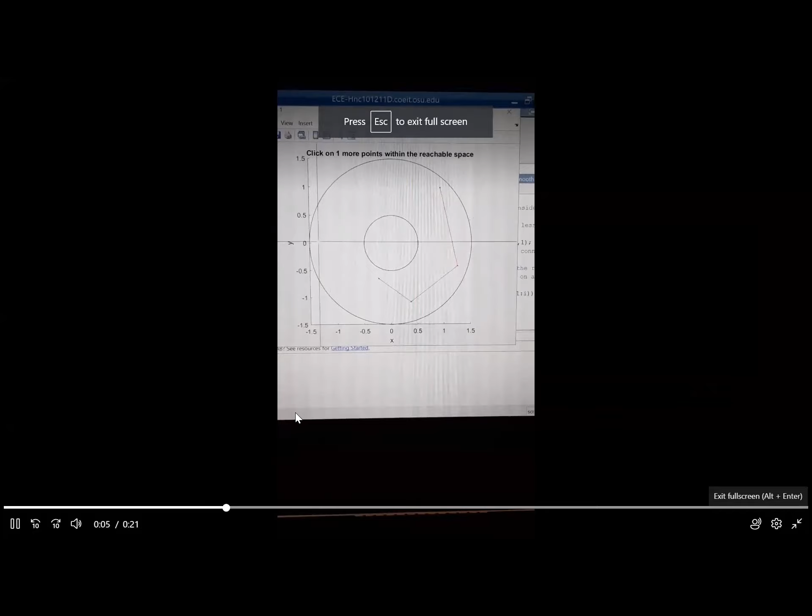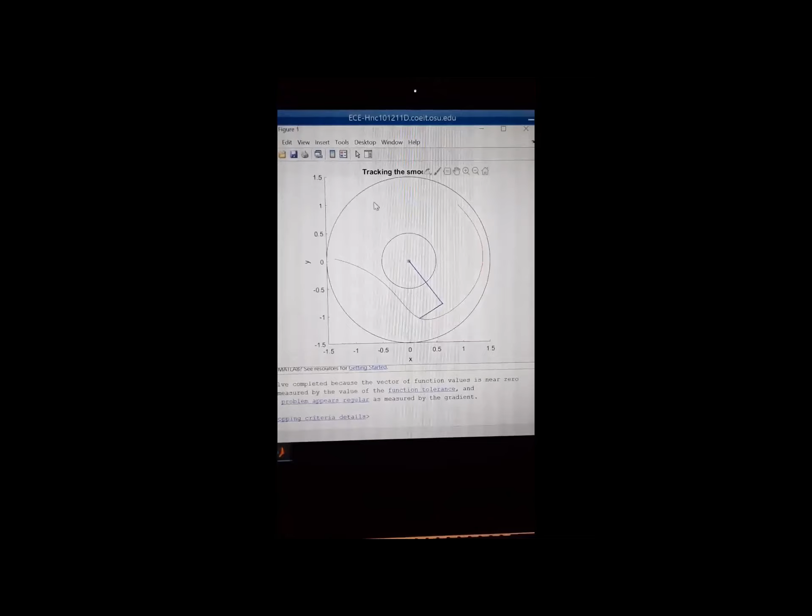So here they are picking the points and it is drawing the line. This is very good because I can see where the points are. It fits the curve. Then this is your 2-link robot. It starts from the initial point and tracks this line. If you remember, every line is made of points. You know the desired point that your end effector needs to reach at every single time. You choose what method to solve it with. I can't help you more than this.

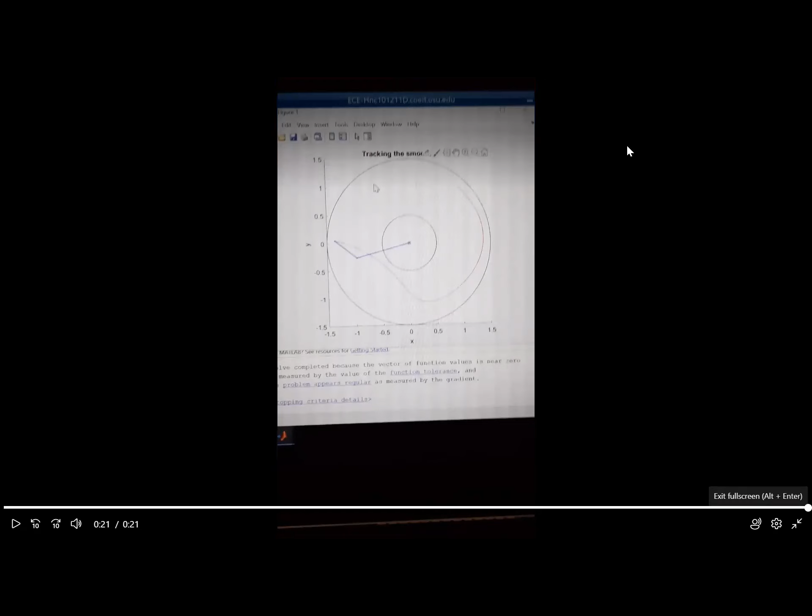All right. Then solve first for the general simple case. Once you figure that out, try to think, okay, what are the other scenarios that can happen? What if the curve goes into the white space that is not the workspace? What can I do in my algorithm so that the robot doesn't break, continues on something and goes back to it? All right. I've given you like 4 or 5 tips. It's recorded, so when you're doing the assignment, go back and listen to this part.

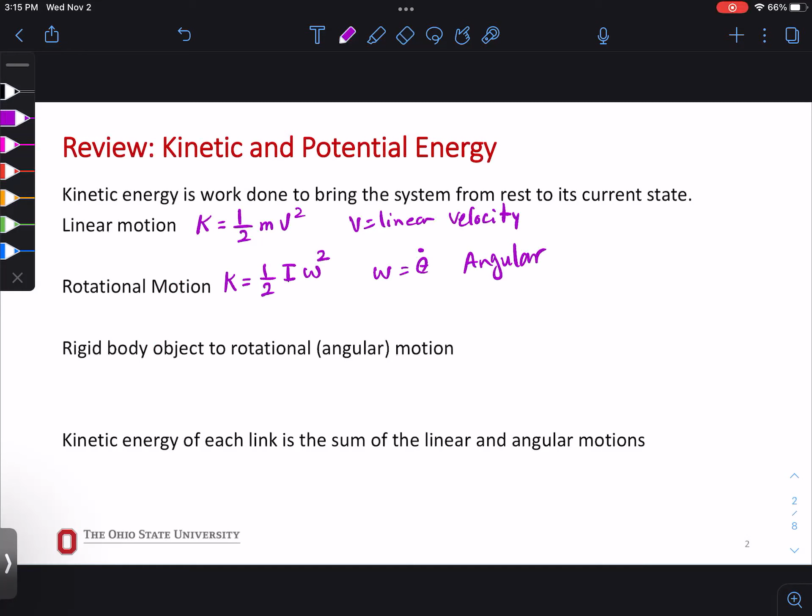For a rigid body that is subjected to rotational or angular motion, so this is when we usually talk about one mass, right? When we have a rigid body, we usually have an accumulation of links that are connected, and we show them with a mass. So in a rigid body, you could have different masses. Now, how do we write the linear and rotational kinetic energy for that?

For the rotational, the equation is almost the same thing, but the way we write it is different because we need to perform matrix multiplication. That's the only difference. So K would be 1/2 omega transpose I_C omega. I_C is your tensor of inertia; it's in matrix form.

For kinetic energy of each link, you could write that for the linear motion as well, right? So how would it look like for linear motion? 1/2 mi of that link, because that's a scalar, right? V transpose V. So you can actually multiply them. Yeah, 3 by 1 and 1 by 3.

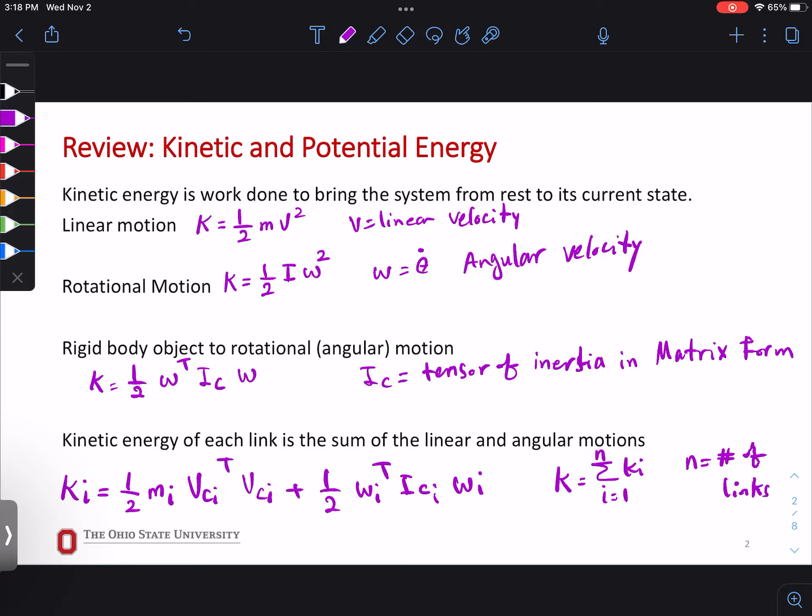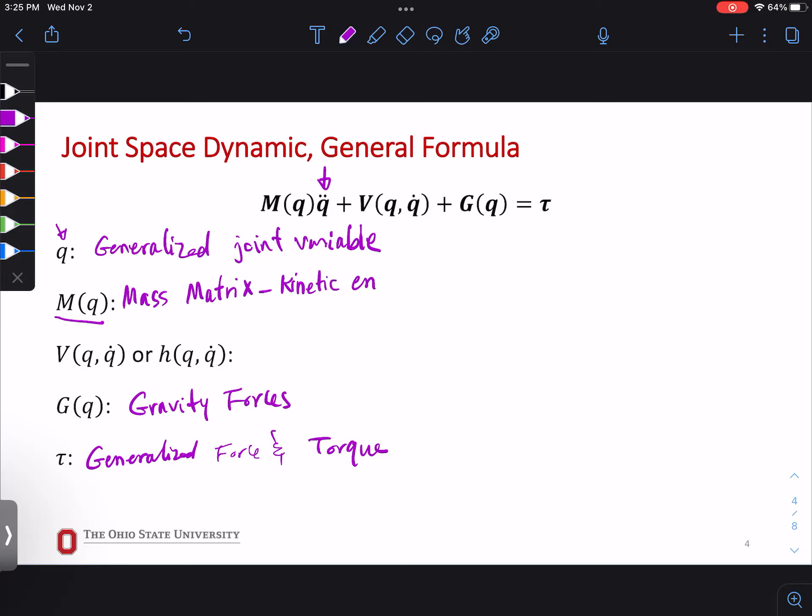Generalized joint variable. All right, so what is M of Q? It's multiplied by Q double dot. It is a mass matrix. You will see it represents the kinetic energy. This is always symmetric and positive definite. For positive definite, I'm gonna add it to our next lecture, why positive definite and what is it. But it has to do with the eigenvalues; all the eigenvalues have to be positive.

Now we have this term, we either call them V or h. Do you remember what they were from before? These are quadratic terms. What did they represent? So these are your quadratic terms, and there are two terms. There is first derivation in them, which if you have the product of first derivations, qi dot times qj dot, of two different joints, these are the Coriolis terms. If you have the product of qi dot squared, this one is centrifugal.

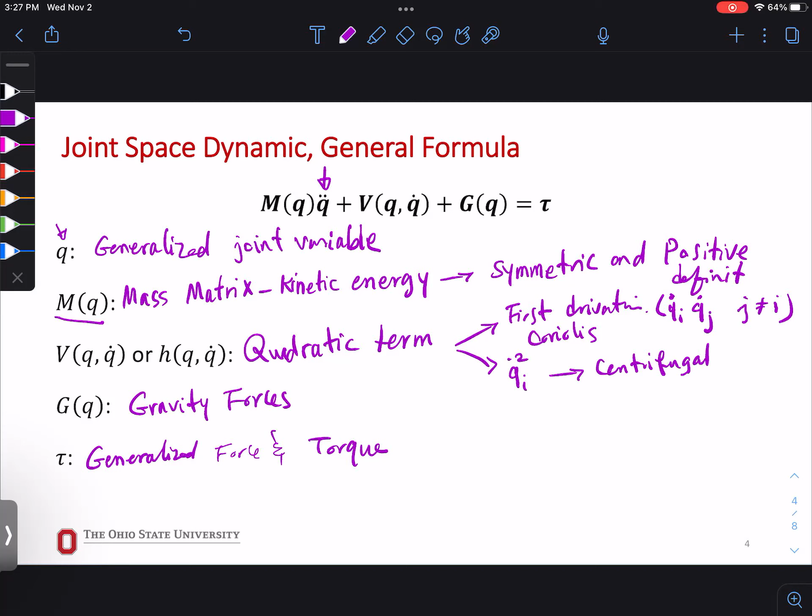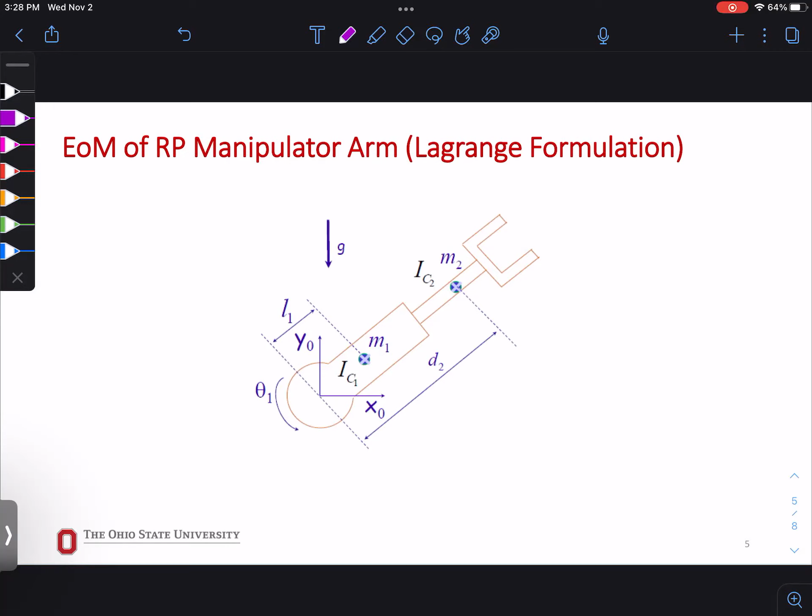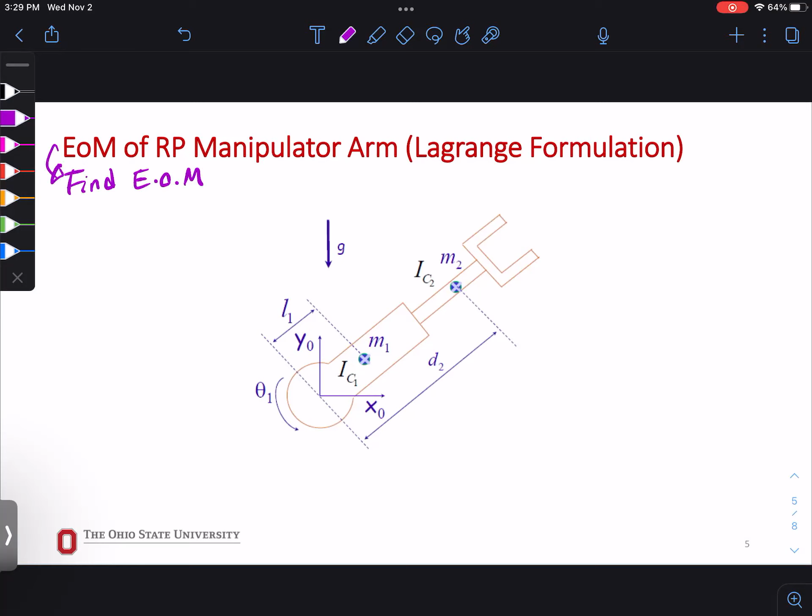And you also asked me, can you write down the question? What is it that you're trying to find on each example? Equation of motion. Usually, if an example comes after a piece of lecture, that is the question. So find the equation of motion of an RP manipulator with this information you have. You also have two more pieces of information. Let's say you know IC1 and IC2: IXX1, IYY1, IZZ1, and similar for the other one.

So this just means, assume we have this. What is your approach? I want everyone to write their approach. How would you solve this, step by step? That's all I want. No, step one, are you trying to generalize, what is the next? Not in the math. What are the steps that you can take to solve it? What is step two?

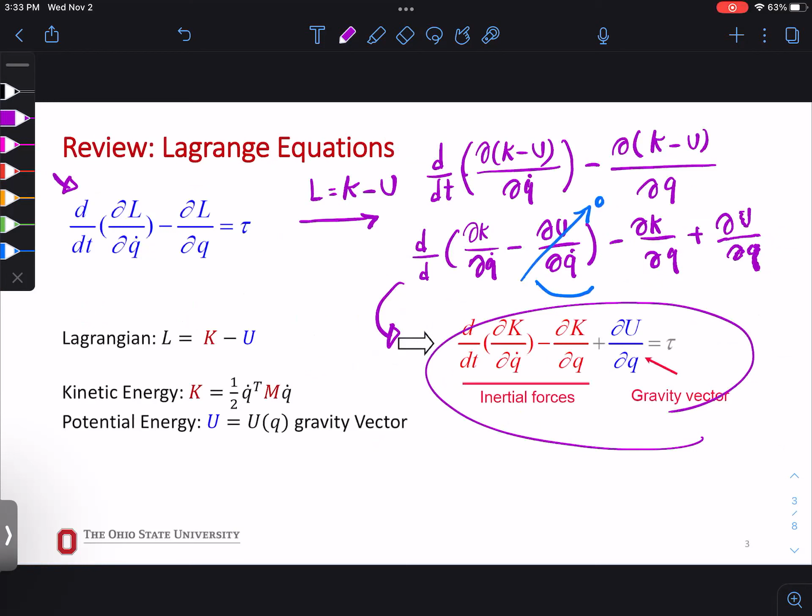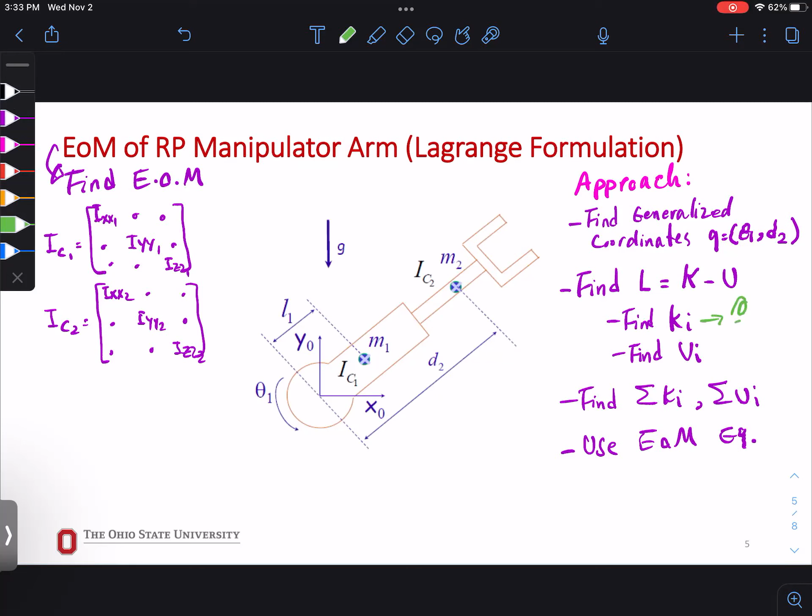Find your Lagrangian, which is K minus U. I know I need to find my Lagrangian because I'm going to use the general form for the equation of motion. Now to find the Lagrangian, I need to find Ki and Ui. So the next thing would be find the Ki's, find Ui. Once I found them, find sigma Ki and sigma Ui. Now I can create my L, then I can use the EoM equation, which is this guy. So this is your approach. The rest is just doing the math.

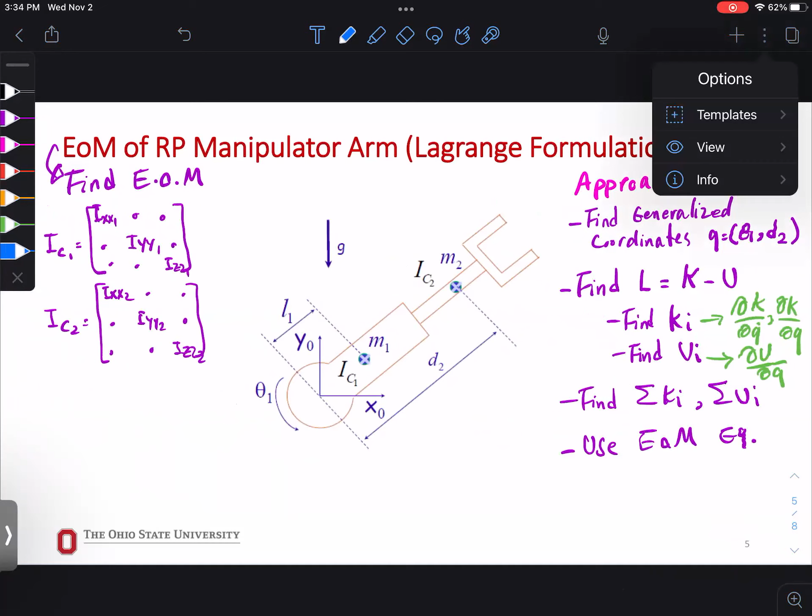I'm gonna actually now solve it, following my approach. I found Q is theta 1 and D2. We don't know what the prismatic is, but there is D2. You can assume the zero of the prismatic from here all the way there. Does it matter? You can say it is like a D3 from the end effector plus a fixed value. You can also do that. Because prismatic is a fixed value plus a variable, you can use it separately or just put them all together.

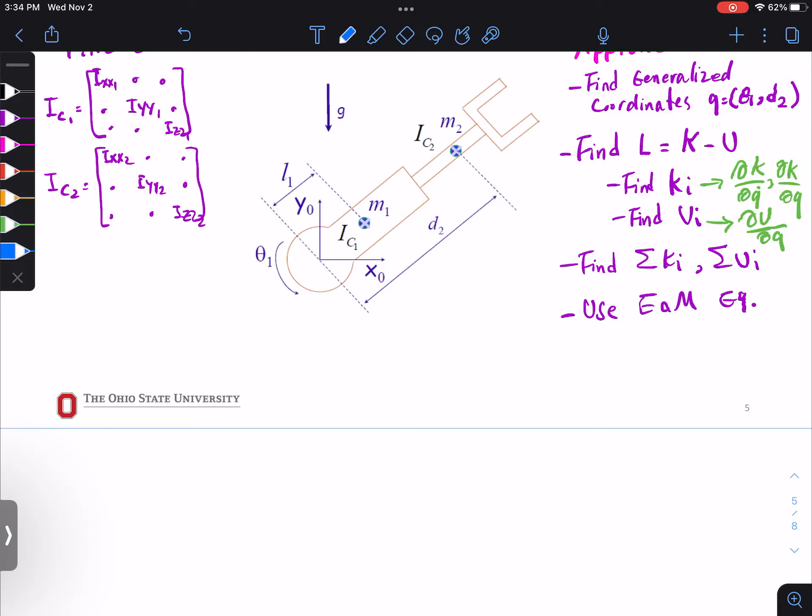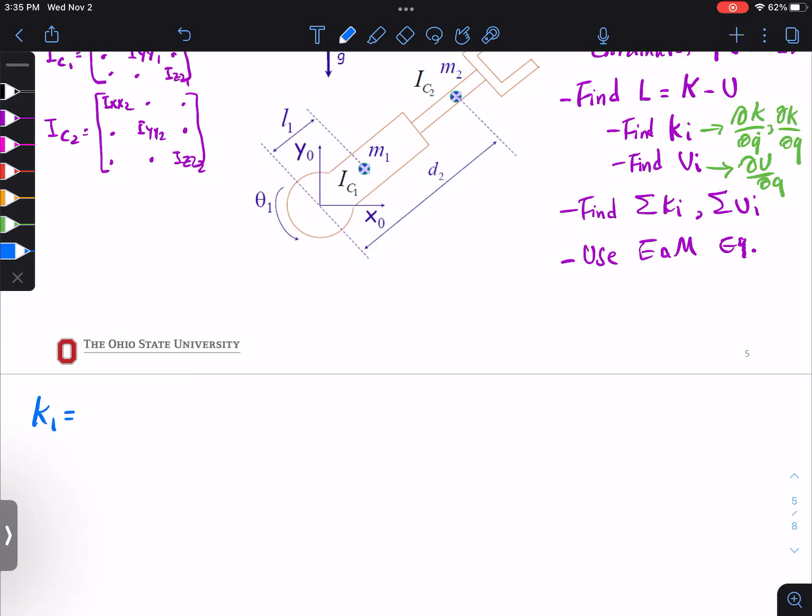So just easily change, but there's always a fixed part into it. So just make the equation easier for myself there. Now I'm going to start writing, finding Ki and Ui's. K1, because I have two links, so I know I have K1 and K2. K1 is 1/2 M1 L1 squared theta dot 1 squared.

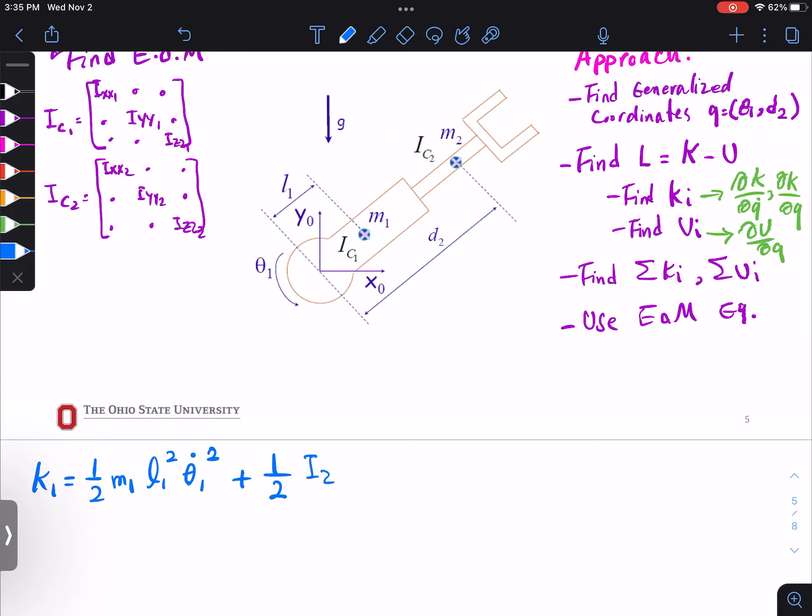How did we do that? If you remember the example before, we got into this. You can write in X and Y direction, and then when you calculate both of them, you will get to L1 squared theta dot 1 squared. So that's the linear part of it. Plus, we have the rotation because of the revolute joint: 1/2 IZZ theta 1 dot. I'm solving it for one link at a time right now, so I can do that. Then this becomes 1/2 M1 L1 squared plus IZZ, and I can factor out theta dot 1 squared.

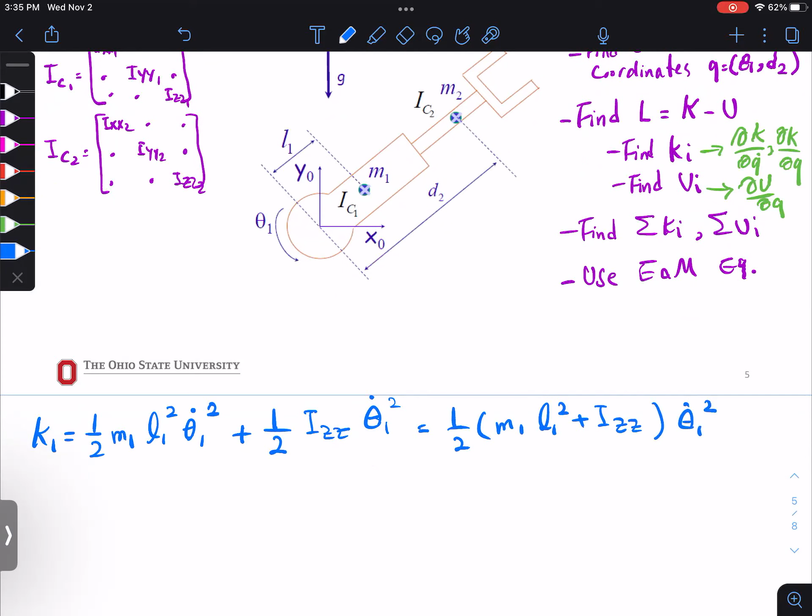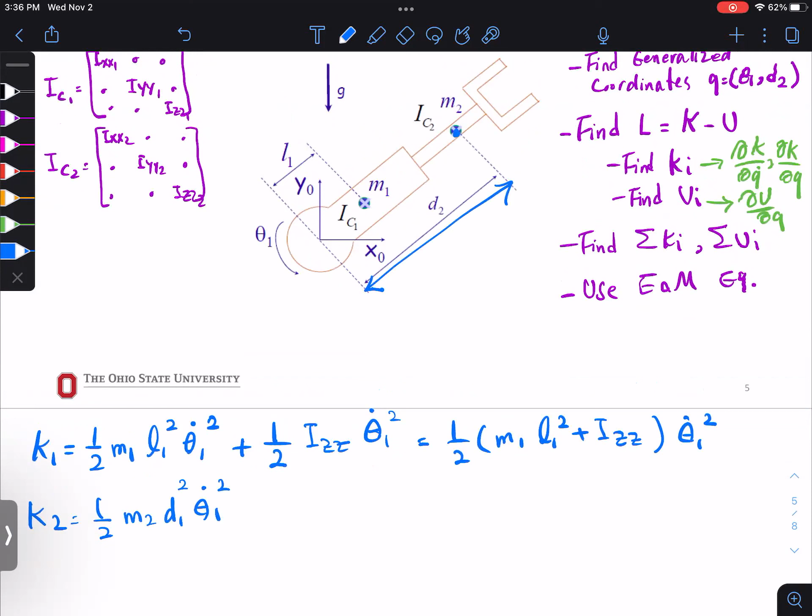K2 is 1/2 M2. Now this one is going to be this distance, D1 squared theta dot 1 squared, plus 1/2 IZZ2. So that one is ZZ1. Theta dot 1 squared plus 1/2 M2 D2 dot squared. So what happened here? Can someone explain it to me? Why do I have two terms for linear velocity? Well, for kinematics, I have two kinematics terms, right? Why?

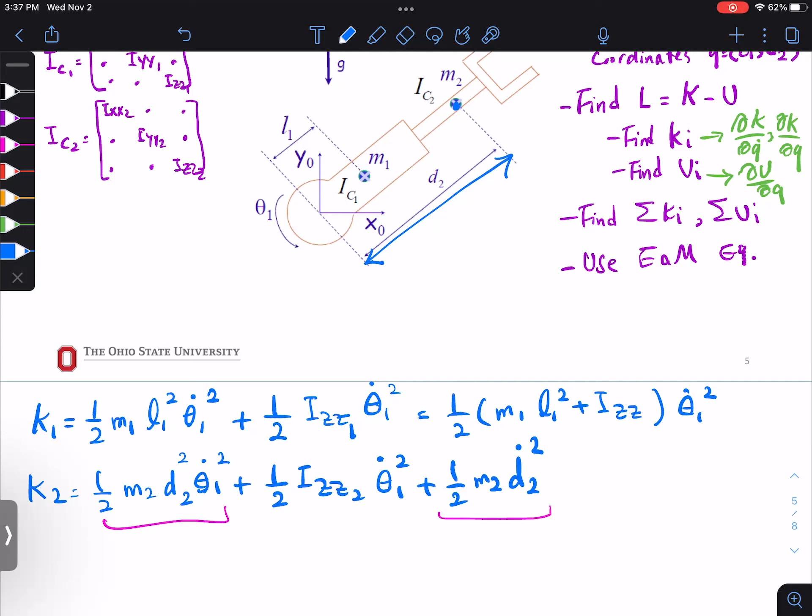Yeah. One because of the rotation, one because of the kinematic. So, assuming that you remember all of this, you are using your knowledge from before. Okay, it should carry. So D1, so you are separating, let me check, make sure that I'm saying it right. It's D2. Yeah, I figured I was wrong. Yes, it's D2, because it's the distance to the center of mass, but because of the rotation of the first joint, there will be a linear velocity there. Thank you. Then the second part is the velocity that way. So you have two different vectors of velocities, right? One is pointing this way, one is pointing that way.

Now we have K1 and K2, we put them together, right? That becomes your kinetic energy. So your K is K1 plus K2. I'm gonna write this one down with 1/2 because you'll see how the mass matrix will play in here. How about U? What is U1? What is U2? Right? So this is your gravity, mass 1, mass 2, mg1, mg2.

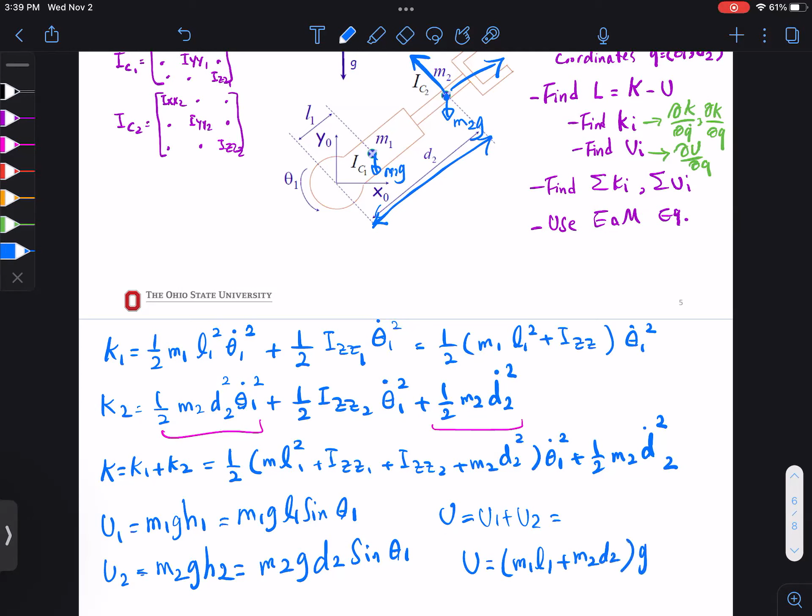M1 G L1 sine of theta 1. Then the second one is M2 G H2. Here it is M2 G D2 sine of theta 1. Now, because we counted this as D2, we don't have to add them. But if you had it separately, you'd simply just have to add to this, right? So it's not a big deal. I have to find U. So U1 plus U2 is U. So U becomes M1 L1 plus M2 D2, times G sine of theta 1. This is U. This is K.

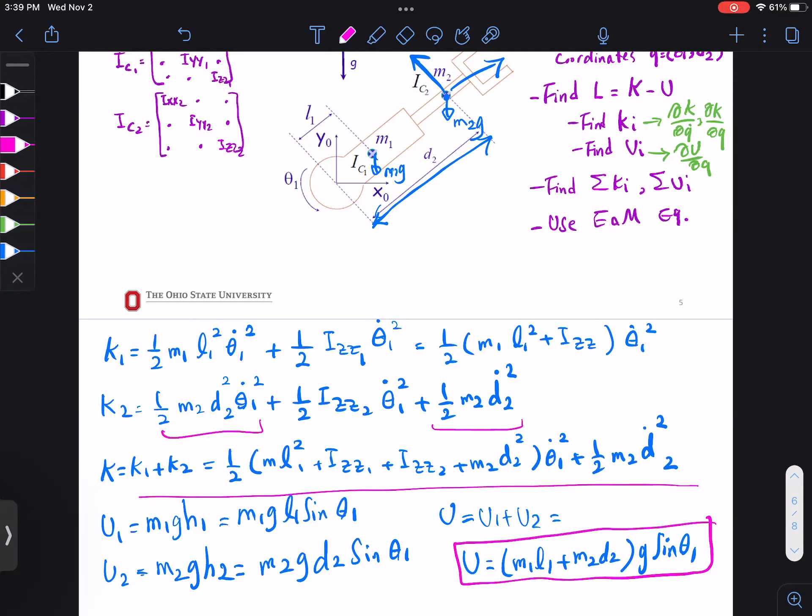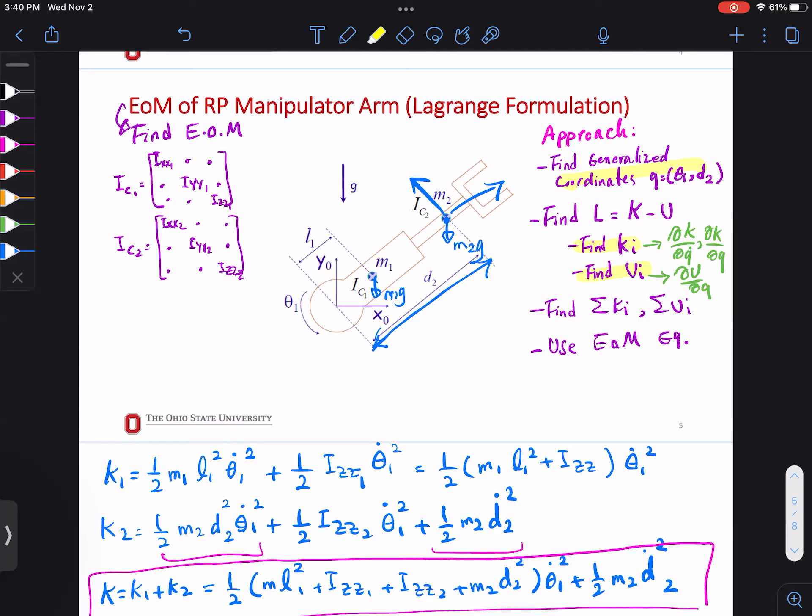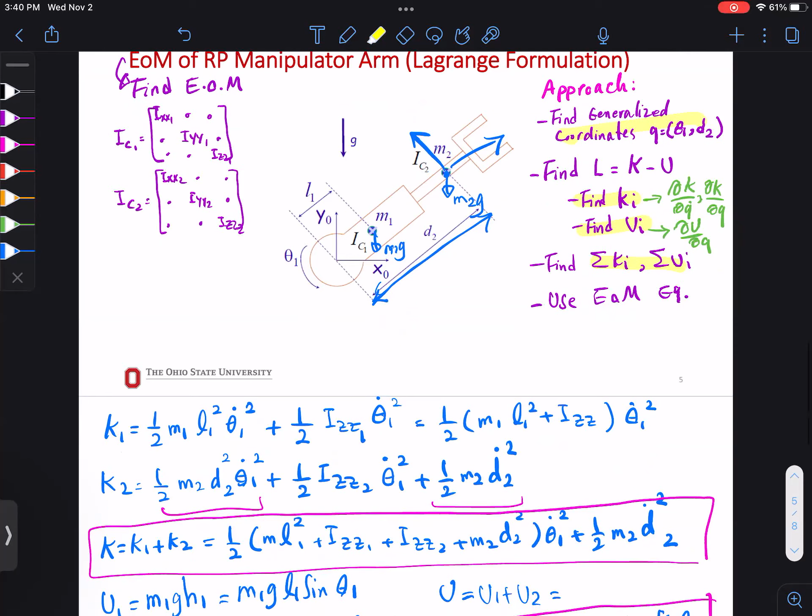So I did this, so I'm gonna mark it. Did this first part, did this part, right? Now, I kind of skipped the green part because I found this, but I still can't get the differentiation, right? It doesn't matter. I could do it separately and put them together or just put them together. So the next part that takes a lot of calculation is the partial derivative part of it, right? You have to do it one by one.

So for K with respect to Q dot I, right? And I also need to find d/dt of partial K over Q dot I. So I'm putting down what I need to find. I'm following my steps. Then I also need to find K with respect to Q. One more, U with respect to Q. Now let's see what they are.

So since we have two links, these are all 2 by 1 vectors because they have 2 parts, K1 and K2. So partial derivative of K with respect to your first joint variable, theta dot 1. Partial derivative with respect to your second one, which is your D2 dot. Here you have similar, but with respect to your Q, so it's theta 1, and then this is with respect to D2. Here is U with respect to theta 1, and U with respect to D2.

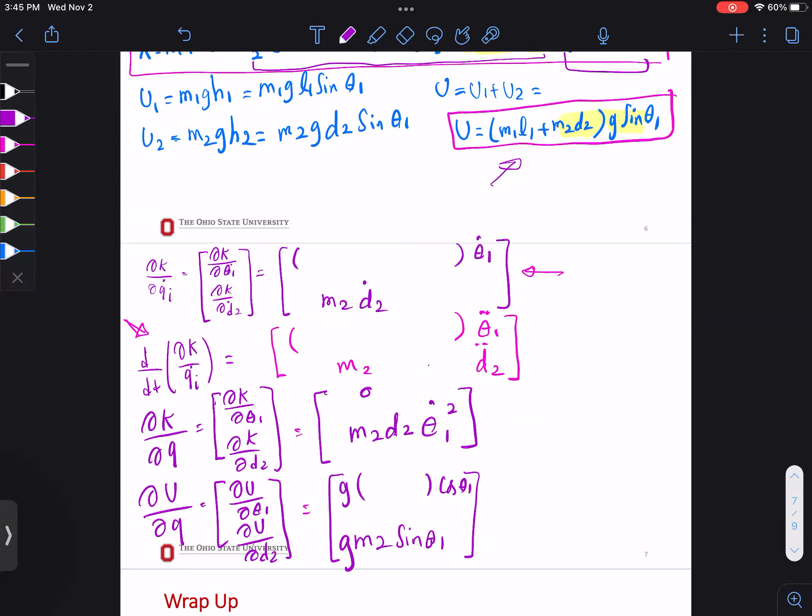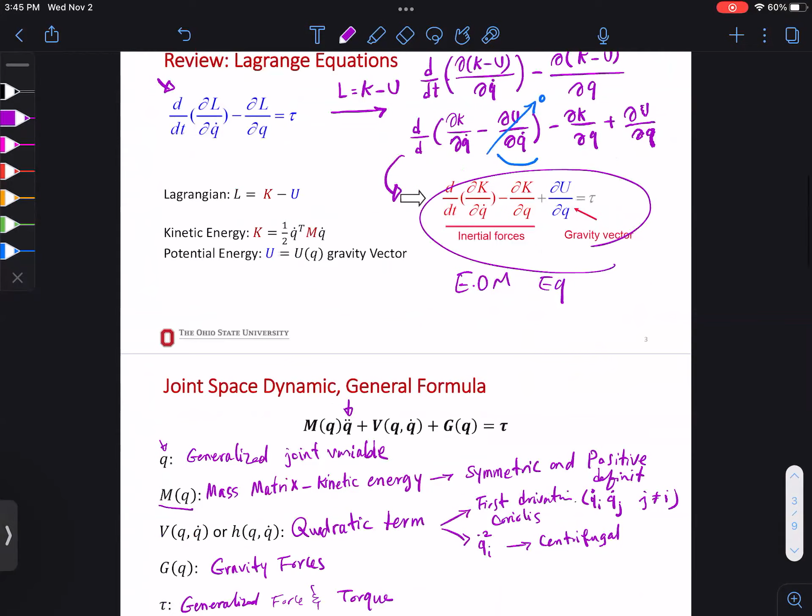All right, so we have 4 parts. Well, we needed 3 parts. This one, this one, this one to put in our equation of motion. We have all of them. We just put them back to back, equal to tau. Tau is tau 1 and tau 2, right? Because we have 2 links, we could have 2 external forces.

So it might seem overwhelming and a lot, but if you follow the steps, if you have that approach and follow one by one, how many equations will you need to remember to be able to write this? You have two equations for kinetic energy, one for potential energy, and the EOM. That's all you need to remember or have in your cheat sheet. And then just follow that depending on if you have prismatic or revolute. Right? So it is a lot to write, but the concept is not complicated if you remember the approach properly.

Now, if you put all of this together, you will have theta double dot 1 and d double dot 2. So when you open them, what would be the matrix that is multiplied by theta double dot 1 and d double dot 2? You need to put it in matrix form after you put them all together. The coefficient that is pre-multiplied by the acceleration, what is it called? Mass matrix. That's how you find your mass matrix.